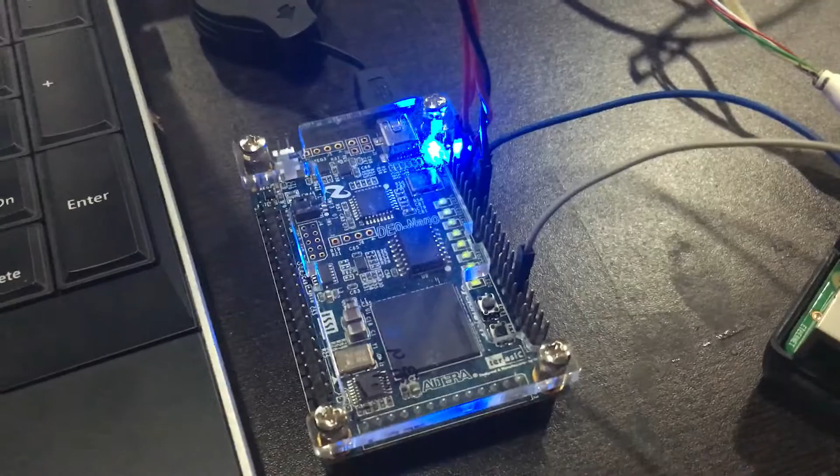When I say reconfigurable hardware, this is essentially it. This is an FPGA, which stands for Field Programmable Gate Array. As you can see, I'm pointing to it, and this acts like a slave and is connected to a Raspberry Pi 3.

This Raspberry Pi 3 is hosting a Node.js Predix server that sends data directly onto the cloud. This is a Wi-Fi enabled Raspberry Pi 3 device that acts like a master, and these wires, the red ones and blue ones, are jumper wires which connect the slave to the master using the SPI protocol, the Serial Peripheral Interface Protocol.

So what hardware problem did I solve? As you can see, doing real-time simulation with generic hardware is inefficient and often time consuming. So what I've done here is use FPGAs. This means no hardware change is required. It's very fast real-time data accelerated hardware, model emulation at huge scale is possible for any given model size, and you can have hardware acceleration and reconfigurable virtual hardware in the loop.

So how did I solve this problem? I used, as I told you earlier, Raspberry Pi and FPGA, connected via SPI, and I used Predix, a platform as a service.

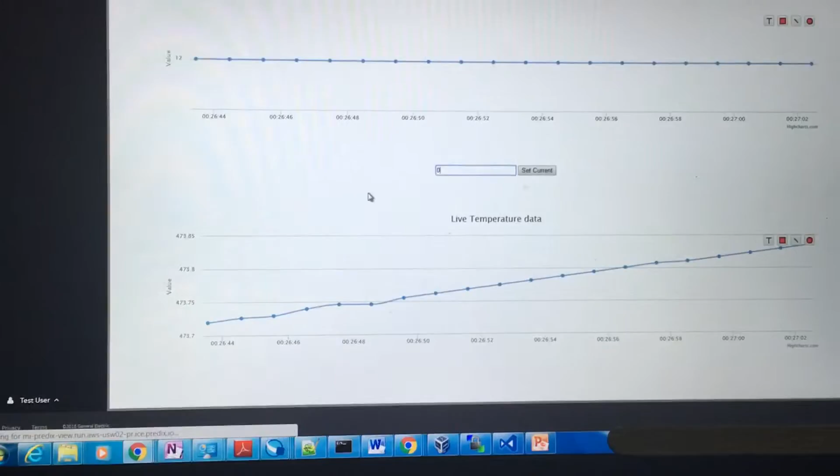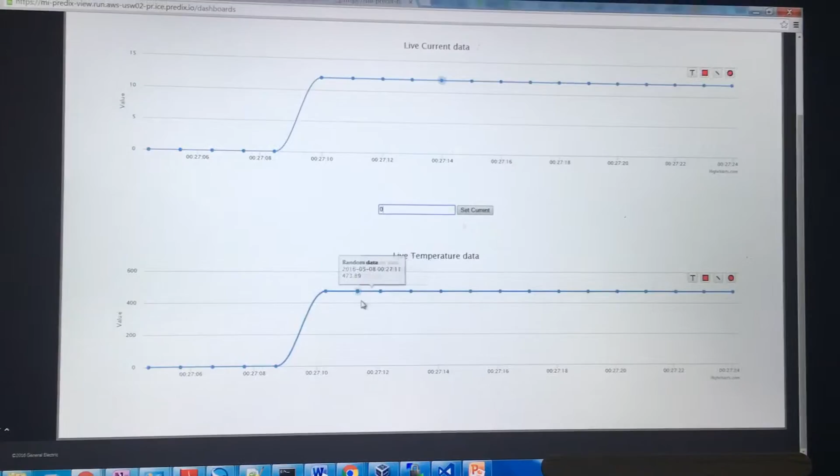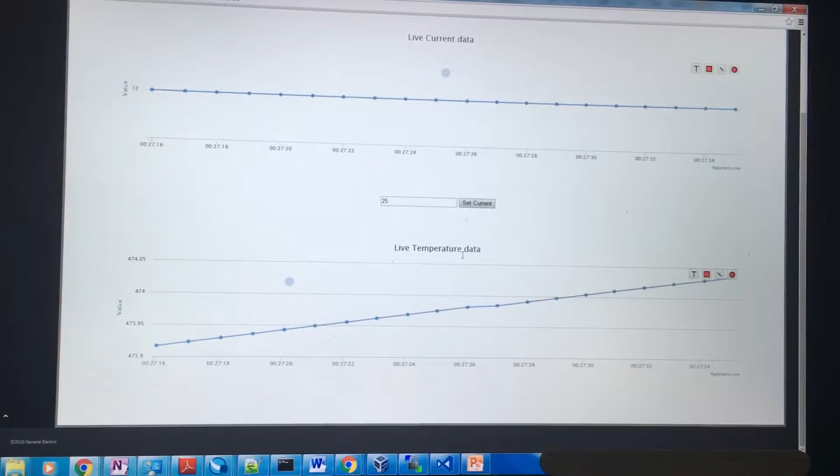For 473.89, what I'm trying to do now is increase the current to 25 and set the current. As soon as I set it to 25, look at the temperature here, it increases. This is the area where you saw it before, and this is the area where it increased.

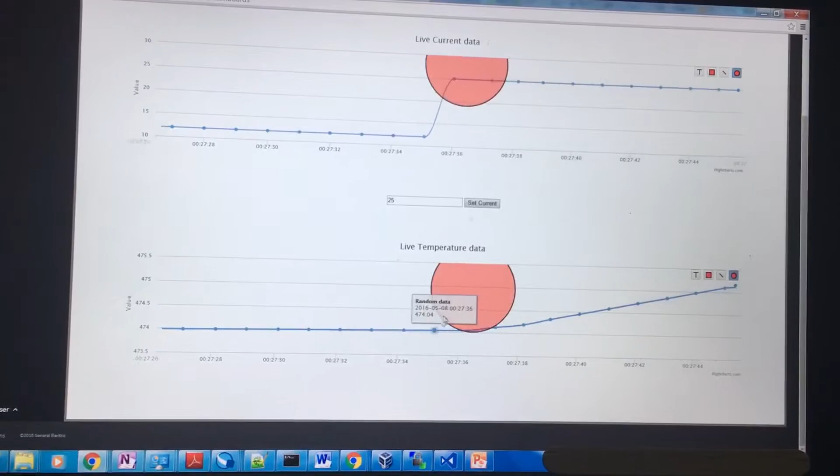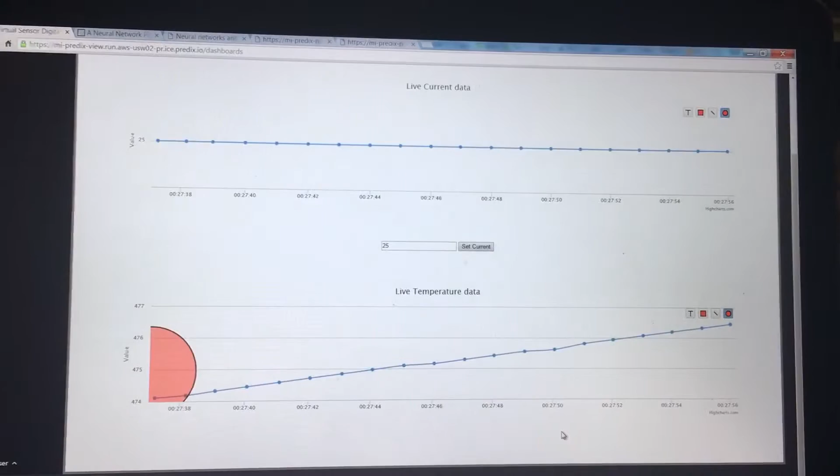This is how it increases based on the current supplied to the copper wire; the temperature inside the copper increases. This is just to prove that we can build a real model, a real controller, whatever it can be, fed with real-time data. So all the calculations are done in real time.

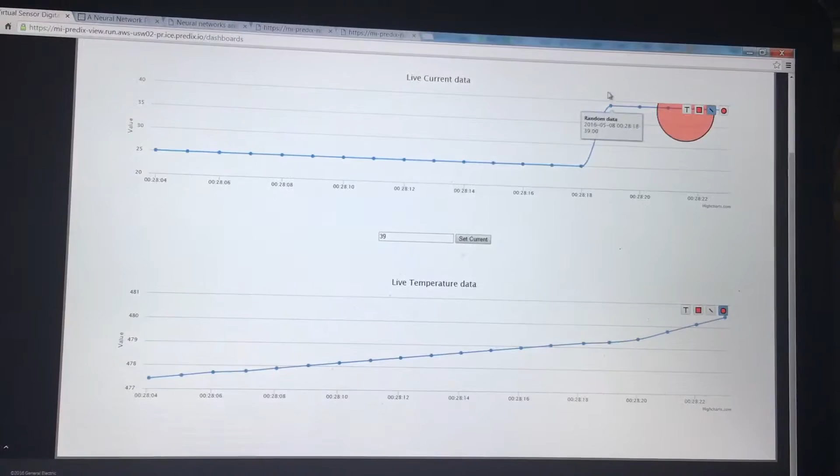Based on the value of the current, if I change it to say 39 and set the current, see, it immediately takes effect. The current is increased here, you can see this is the area where the current increased, and this is the area where the temperature also increased. So this is how it basically goes about it.

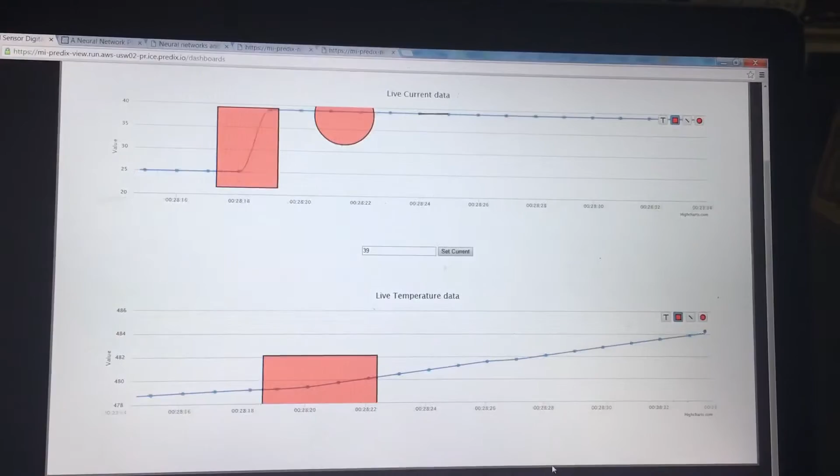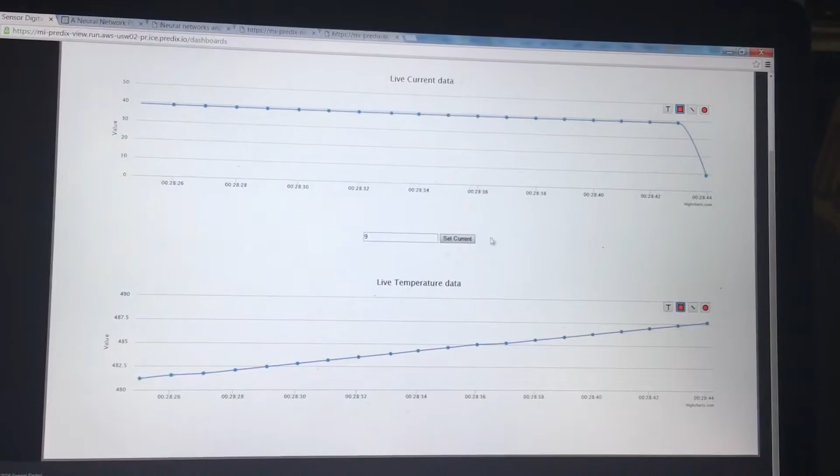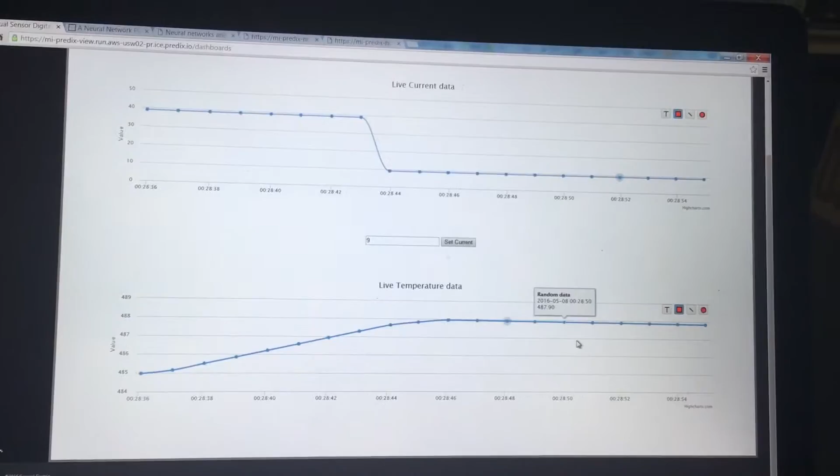Now what I'll do is bring it down to 9 degrees and set the current. As you can see, it's come to 9 degrees, but the temperature gradually decreases, if you could see, the value gradually decreases. For that, I've used the data from this Raspberry Pi.

I could zoom into it, is 487.34, current 9. So this is how it works, with real-time data being fetched and analyzed.

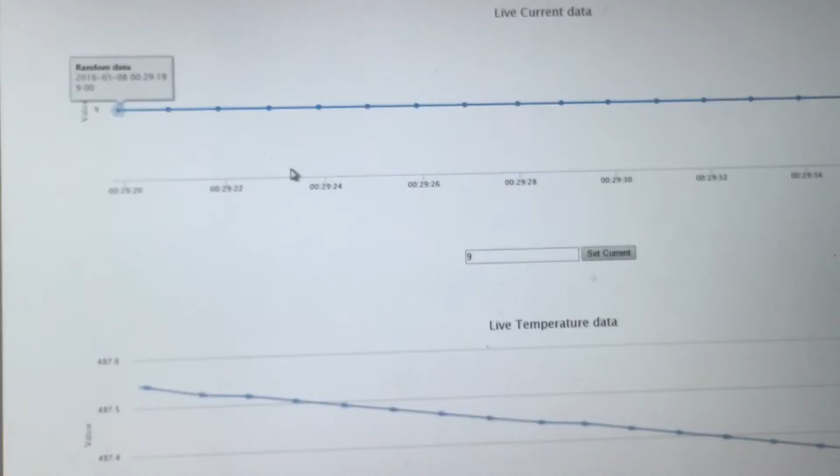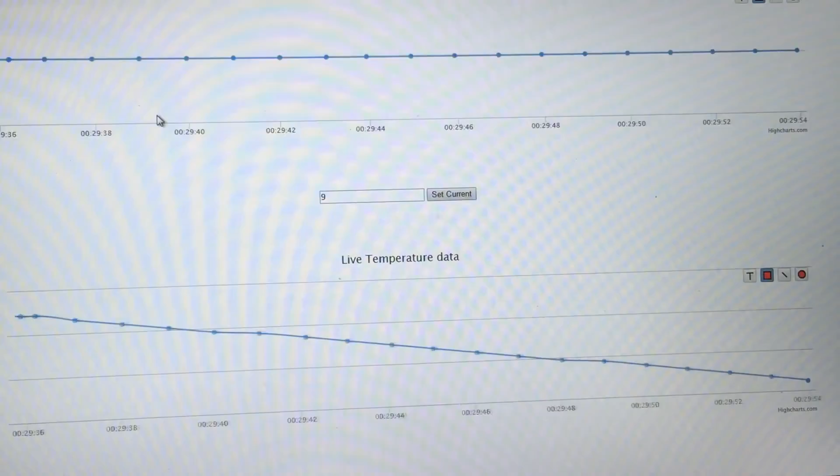So we have built basically a virtual sensor with real-time data being fed, and all the features of FPGA which I told you earlier are possible to help this model. Thank you.